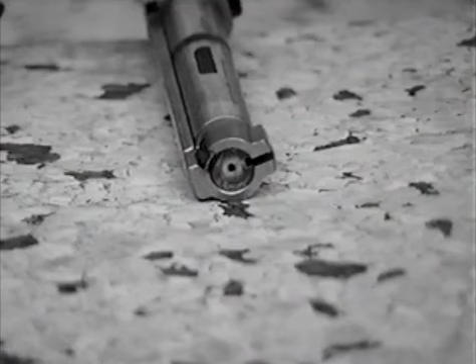There are two methods used to cock the firing pin housed within the bolt. The first is where the firing pin is drawn back and cocked as the bolt handle is raised from the locked position. The second method cocks the firing pin as the bolt is pushed forward, just before it reaches the locking position.

Ammunition is either loaded directly through the floor of the receiver or is loaded into a magazine, which is then clipped into the receiver from below. As the bolt is eased forward, a round is pushed by the bolt face into the chamber of the barrel, and the bolt is turned by its handle to engage the lugs, which lock the bolt securely to the receiver, ready to fire a round.

As the round was chambered, a sprung extractor clip eases over the rim on the base of the round, ready to pull the spent case from the chamber when the bolt is pulled back. The spent case is ejected by an arm mounted at the rear of the receiver, which slides in a slot machined into the bolt face.

As the bolt is eased forward again, a fresh round is pushed into the chamber and the cycle is complete. These basic operations apply to both rimfire and centerfire rifles, the major difference being the firing pin, which is located centrally on the centerfire and located on the edge of the bolt face on a rimfire.

Before we continue, there are a few technical terms associated with ammunition, and the first is FPS. FPS is a shortened version of feet per second, and this is used to describe the velocity of the bullet, in the same way that mph, or miles per hour, is used to describe the speed of a vehicle.

Muzzle velocity is the speed of the bullet at or near the rifle's muzzle.

The next term is grains. Grains are a unit of weight, as are pounds, ounces, or grams. With all firearms, grains are used to describe the weight of bullets and also the weight of the nitro powder charge used in the manufacture of a complete round.

The last term for now is foot-pounds. Foot-pounds describe the energy of the bullet and is derived from a mathematical formula using the speed and weight of the bullet. Generally, a large foot-pound figure has more stopping power than a smaller one.

Now, we'll have a brief look at internal ballistics, and we'll start with rimfires. Modern rimfire rifles use the long rifle round. Rimfire long rifle sonic and subsonic rounds are the same size, but the Magnum round, which is larger, needs a rifle chambered to accept it.

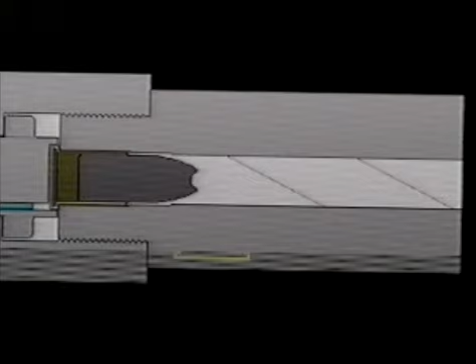The round is fired by the firing pin striking the rim of the case, which compresses the primer, causing it to detonate. The hot gases from the primer then ignite the propellant, and the resulting expanding gas forces the bullet from the case and up the barrel.

Rimfire ammunition cannot be reloaded.

Now, we'll look at centerfire ammunition. Centerfire rifles are available in many different calibers, and the ammunition has many variations in weight and type.

The case for the centerfire rifle ammunition is normally made from brass, with a primer pocket in its base and a small flash hole leading from the primer pocket into the main part of the case.

The primer is formed from a metal cup and contains a solid disc of explosive with a tiny metal anvil inserted upside down in contact with this explosive. The primer is pressed into the pocket in the bottom of the case.

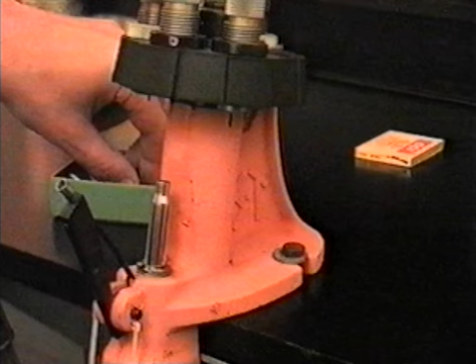A measured amount of propellant powder is now added, and finally, a bullet is pressed into the case mouth.

When the firing pin strikes the primer, it distorts the metal cup and compresses the explosive against the anvil, causing the explosive to detonate. The resulting flash travels through the flash hole and ignites the propellant.

The expanding gas from the propellant first forces the brass case to enlarge, which seals the small space between the chamber and the case. Then, the still expanding gas forces the bullet from the case and up the barrel.

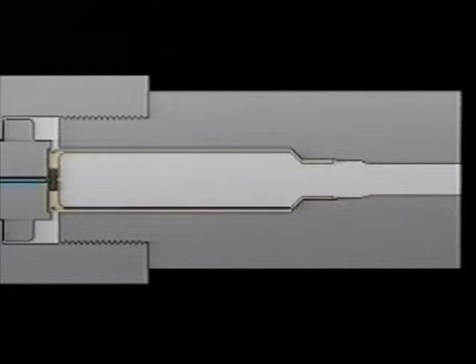The initial expansion of the case to seal it in the chamber is very important. Pressure in the case can reach 50,000 pounds per square inch, and as well as sealing the case to the chamber, the friction between them holds the case in position, which ensures that the bolt is not unduly stressed by the case moving rearwards.

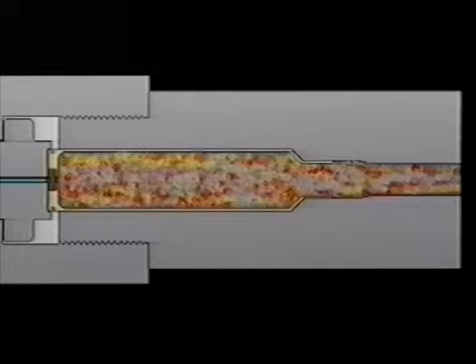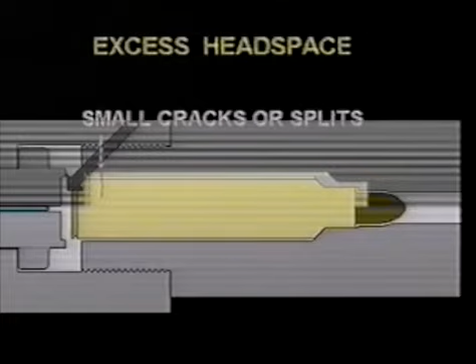Extreme pressure on the bolt face will eventually cause excess headspace. This is the distance between the bolt face and the rear of the case when the bolt is closed. Excess headspace will lead to case fractures near the rim, which in severe cases will blow the rifle apart.

Check your spent cases, and if you find any splits or cracks, take the rifle to a gunsmith. Don't use it. Always make sure that your ammunition is clean and free of oil or water, and when you clean your rifle, ensure that the chamber is also clean and dry.

As you have already seen, centerfire ammunition can be reloaded. Before we move on, always buy good quality ammunition in a reasonable quantity from the same manufacturer's batch.

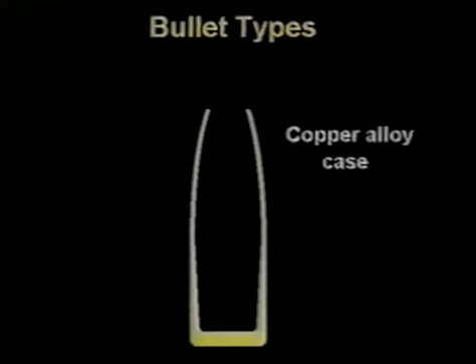As mentioned earlier, rimfire bullets are generally made of soft lead with a wax or gilded finish. But because of the much higher bullet velocities and weights used with centerfire ammunition, the construction is a lot more complex. Centerfire bullets are generally constructed with a copper or copper alloy case which is filled with lead or an alloy of lead.

The most widely used types for hunting are the soft point and the hollow point. Both soft and hollow point bullets expand and mushroom easily when contacting flesh and bone. This expansion slows the bullet down and therefore expends most of its energy within the quarry.

Full metal jacket and target or match type bullets are designed for range shooting and not hunting. They tend to travel straight through flesh without expanding, and they should not be used on live quarry.

Now we'll look at external ballistics. The following diagrams and tables are only examples and are exaggerated for the sake of clarity. Refer to your ammunition manufacturer's ballistic tables for your own caliber, or if you reload, then use the bullet maker's tables.

Regular shooting practice over known distances will give you confidence in gauging bullet drop and wind effects at various ranges. And first, we'll look at bullet drop. Imagine a rifle fixed to a stable platform and adjusted so that the line of the bore is parallel to the ground.

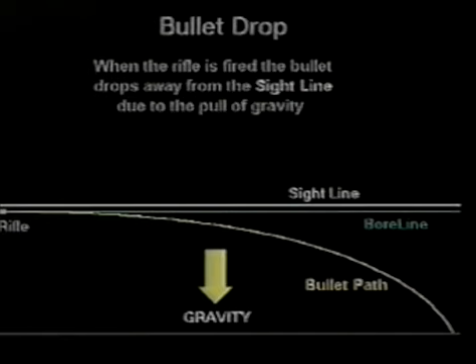If a bullet is now fired, the force of gravity pulls it downwards until it finally hits the ground some distance from the rifle. The further the bullet travels away from the rifle, the greater the distance between the sight line and the bullet.

If we now adjust the telescopic sight so that the sight line crosses the bullet path at, say, 200 yards, the rifle is now said to be zeroed at 200 yards.

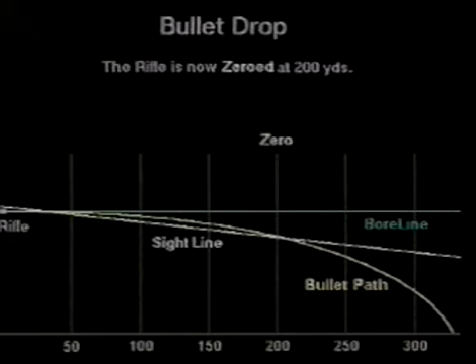The bullet crosses the sight line a few yards from the barrel and then travels above the sight line before the zero and below the sight line after the zero.

At 50 yards, the bullet is 0.6 of an inch high. At 100 yards, it is 2 inches high. And at 150 yards, it is 1.8 inches high.

At 250 yards, the bullet is 4 inches below the sight line, and at the 300-yard mark, it is 12.5 inches below.

We'll be coming back to bullet drop shortly, but now we'll look at the effect of wind on the bullet.

With a 20-mile-an-hour headwind, the bullet still follows the sight line, but as the wind changes direction, so the bullet is blown further away from the vertical axis, as its distance from the rifle increases.

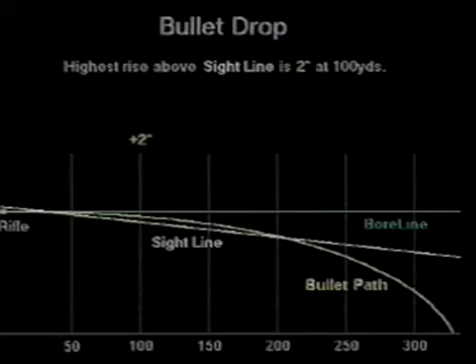If we go back to the bullet drop diagram, the maximum rise of the bullet above the sight line is 2 inches at 100 yards. By using the ammunition maker's ballistic charts, or by trial and error on a range, we look for a corresponding drop of 2 inches below the sight line.

If we now go back to the windage diagram and put the 235-yard mark from the bullet drop calculations on it, we have a maximum deviation with a 20-mile-an-hour wind of 1.9 inches.

If the maximum deviation at different ranges is added to the bullet drop target, it will look like this, at the fixed ranges of 50, 100, 150, 200 and 235 yards.

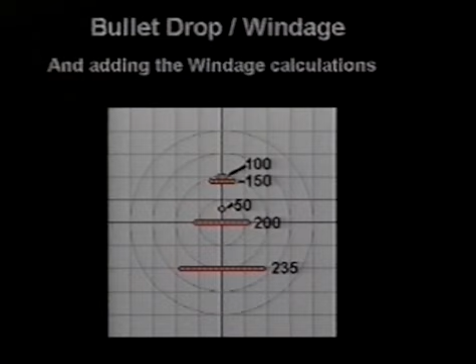So, for any wind up to 20 miles an hour and at any range from say 40 yards out to 235 yards, the bullet will strike within this triangle.

If you imagine the 4-inch triangle superimposed on an animal, the relative size of the triangle is proportional to the quarry size. No matter what the range, the triangle's size remains relative to the size of the animal.

Using this method, we only have to estimate one maximum distance, also one maximum wind speed. In this example, the maximum distance is 235 yards, and the maximum wind speed is 20 miles an hour.

The next area to look at is elevation, or firing up and downhill.

With the rifle on the left of your picture, and using the previous example of a 200-yard zero, the bullet path looks like this. If the rifle is now pointed upwards at an angle of 45 degrees, the bullet will strike higher than it did when the rifle was level.

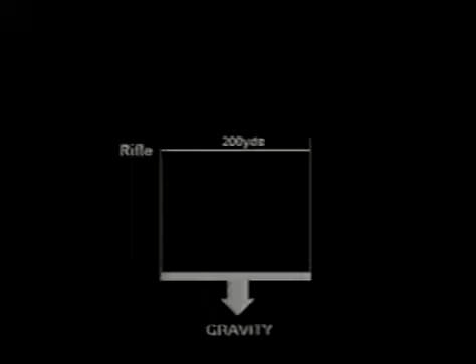But when the rifle is fired up or downhill, the pull of gravity at 90 degrees to the horizontal over this shorter distance has less effect, and the bullet will strike higher than it did when shooting on level ground.

With light bullets and or higher muzzle velocities, the bullet rise will be much less. At normal hunting ranges, say up to 200 yards, and with a reasonable elevation of less than 30 degrees up or down, there's really no need to compensate for bullet rise if using the point-blank range technique. But if you do compensate, then always aim low.

The last item here is recoil. The laws of physics states that for every force there is an equal and opposite force.

When a rifle is fired, the expanding gas forces the bullet up the barrel, but it also pushes the rifle in the opposite direction. Here, we'll use a bullet weighing 200 grains with a muzzle velocity of 3,000 feet per second.

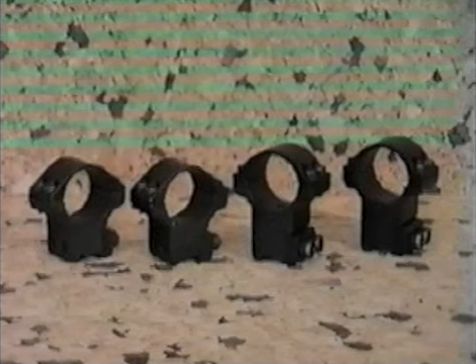During the winter months, you may have many layers of clothing compared to the summer, which will alter the length of pull, so bear this in mind if you have your rifle altered. If you have to use high mounts for your scope because of a large objective lens, then you may need to add padding to the cheek piece to get a comfortable fit.

Eye relief is a term used to describe the distance from the rear lens of a telescopic sight to the shooter's eye when a full, clear sight picture can be seen. Cheaper scopes meant for air guns or rimfires tend to have a short eye relief. If this scope were used on a heavy recoiling rifle, the metal rim could cause serious damage to your eyebrow when the weapon is fired.

If you close your eyes, then mount the rifle and rest your cheek on the stock in a comfortable position as though aiming the rifle, when you open your eyes, you should get a good sight picture. If you have to move your head backwards or forwards to get a correct picture, then the sight needs moving in the opposite direction. The objective is to get a good sight picture as soon as the gun is mounted.

A lot of people hold the stock on the forend much too tightly. This can cause the sight picture to move in time with your heartbeat, and even cause your muscles to tremor, which will affect the sight picture and, of course, accuracy.

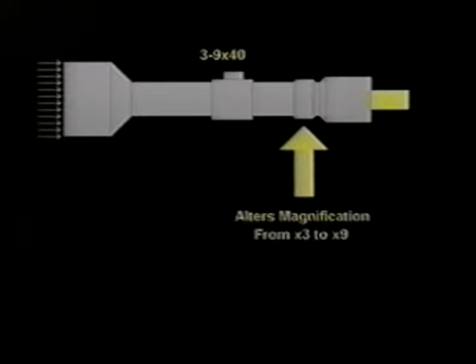This is a variable power scope of 3 to 9 times magnification, with an objective lens size of 40 millimeters. The magnification is varied by rotating a ring placed in front of the eyepiece. As you can see, the exit pupil diameter alters as the magnification of the scope is changed.

Most modern rifles are equipped with grooves machined into the top of the receiver, which will accept one-piece mounts. Some rifles, especially the old Mauser actions, need drilling and threading to accept blocks, to which scope rings are then fitted.

Get the correct mounts and make sure that the objective lens is not touching the barrel and that the eyepiece doesn't foul the bolt handle. Before you try and zero a new rifle or scope, I would suggest that you disassemble the mounts and reassemble them using a thread locking compound, so that the fixing screws won't come loose after prolonged use.

Using a screwdriver or Allen key, take off the ring tops. Remove the scope and place it somewhere safe. Next, remove the ring bases. Now clean the dovetails and the grooves in the receiver.

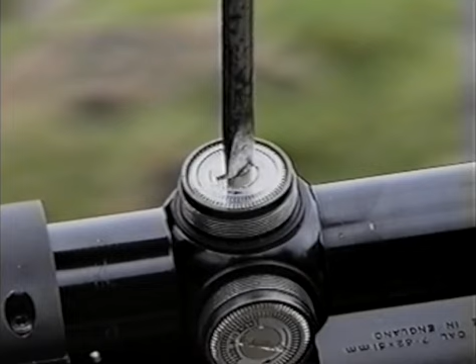The final groups were around 1.5 inches low of the horizontal line, which is about right at this stage, but now we need to set the horizontal zero a bit more precisely. Using the elevation adjuster, we need a group that is near the cross for small caliber, low velocity centerfires and rimfires, or 1/2 of an inch below the cross for high velocity centerfire rifles.

Using the same technique as before, adjust the elevation to bring your group up, and then we can zero the rifle at our intended hunting range.

If at this stage your groups were wildly off, let's say 4 or 5 inches up or down, then the chances are that the sight mounts are wrong. This normally happens with Mauser type actions, where one of the mounting blocks is the wrong size, and this will have to be changed. Otherwise the scope adjustments will be at their extremes, or you may not be able to zero at 100 yards at all.

Now we'll zero at a normal hunting range. As a rough guide, a normal zeroing range for rimfires is 50 to 70 yards. Magnum rimfires and Hornet centerfires can be zeroed at 100 yards, and high velocity centerfires need to strike around 1 inch high at 100 yards, but this is personal choice.

To zero a rifle at say 100 yards, I prefer a proper target, which will allow you to see more precisely where the bullet groups are striking. It's worthwhile spending half an hour with a ruler, pen and compass making a proper target, which can then be photocopied.

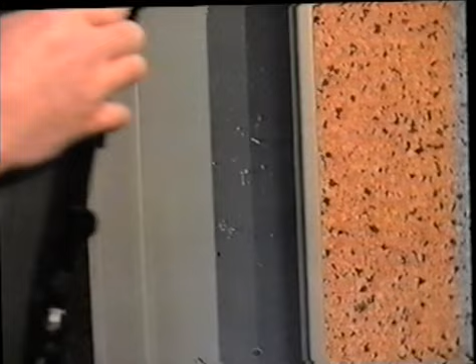If you have stored the rifle with an oiled barrel, use 2 patches to remove most of the oil, followed by 1 patch soaked in meths and 2 dry patches to finish. If you don't finish off with methylated spirit, you'll find that the first few shots will be wide of the mark, due to residue from the cleaning solvent or oil in the barrel.

Lightly oil or spray the exterior metal and wipe clean. If you have a good walnut stock, occasionally rub walnut oil into it with the palm of your hand and leave to dry overnight in a warm room. Polish off with a soft cloth. Varnished or synthetic stocks can be cleaned using a household furniture spray and polished off.

At least once a year, or if the rifle is used in very wet weather, take out the action screws and remove the barrel and action from the stock. Brush off any grit or mud from the metalwork, and if there is any rust, fine wire wool soaked in oil should remove it.

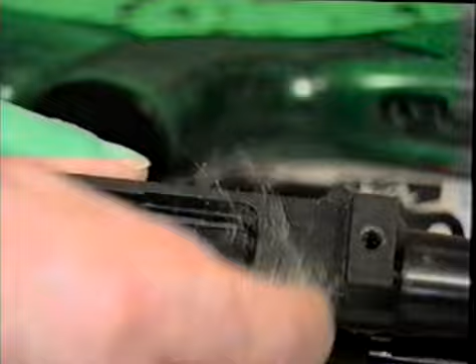If the bluing is affected, get a retouching kit from your gun shop and follow the instructions. Finally, rub oil into all of the metalwork. Brush out the bedding and barrel groove in the stock and reassemble the rifle, taking care to tighten the action screws.

That about brings us to the end of this video, but here are a few tips that might help you. No matter how good a shot you think you are, always spend time on a range, shooting over known distances and in different weather conditions.

Shoot in windy and wet weather to see the effect it has on your bullet placement. Practice kneeling, standing and sitting shots, as you won't always be able to get comfortable in a prone position. And if in doubt, don't shoot.

Get some covers for your scope. These are sometimes supplied with it and are available in various forms, but the ones I prefer are the flip-up type made in America. They fit snugly over the objective lens, and to see through the scope, you just push the small ear forward and the cover springs out of the way. To replace it, just snap it back again.

This type of cover is also available for the eyepiece, but if you have a heavy recoiling rifle, be aware of the operating lever, as this can sometimes catch your eye.

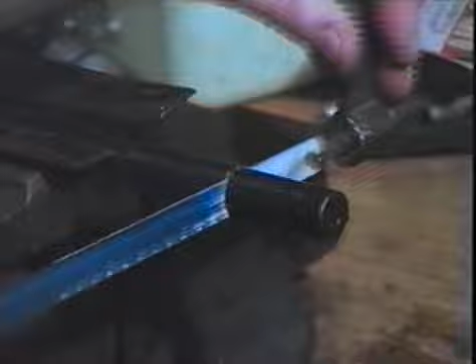The action screws which clamp the receiver and barrel assembly to the stock can cause a lot of accuracy problems. This is more pronounced with a wooden stocked rifle that has been manufactured with foreend pressure. Foreend pressure is used to cut down barrel vibration on light-barreled hunting rifles, which makes them more accurate when using run-of-the-mill ammunition. To check if your rifle has this foreend pressure, slide a piece of paper under the barrel and into the forend.

If the paper stops, then you have foreend pressure, or rubbish, under the barrel. If the paper goes down to the receiver, then the barrel is floating.

If one or both of the action screws are loose, you will get inconsistent groups as the action moves and the fore-end pressure alters between each shot. On the other hand, if the screws are much too tight, the point of aim will alter as the wooden stock swells and shrinks because of humidity and temperature.

With a floating barrel in a wooden stock, these effects aren't so pronounced, and they're even less noticeable with a synthetic stock. The action screws must be reasonably tight, not forced, with the front screws slightly tighter than the rear.

Take out the action and barrel and look at the bedding. The recoil lug has to sit squarely against this front face. The mark left by the lug should be even across this face and across the top. There should be a mark under the tang, but there should be minimal signs of wood to metal contact in the area around the back and sides of the tang.

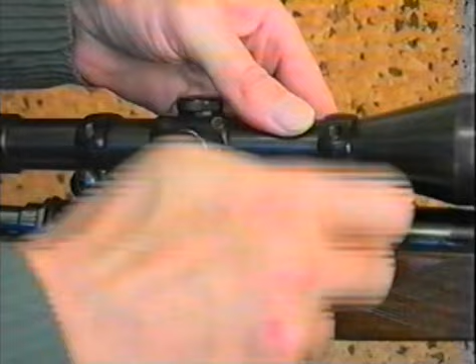Now refit the scope, tightening the bases. Then the ring top that you loosened, then check the other ring top.

If you don't undo one of the ring tops and you tighten the ring bases, you can build a twist into the scope which may cause problems later.

Don't over-tighten the ring tops. Because of the large surface area between the rings and scope, the ring tops only need moderate tightening. If you overdo it, you'll only damage the scope. It won't be any more secure.

Now check if the rifle is still zeroed.

If the parallax is wrong on your scope, then by placing your eye in a slightly different position every time you mount the rifle, the point of impact can change quite dramatically.

The eyepiece adjustment allows you to focus your eye on the crosshair and your target at the same time. This must be correct before you try to eliminate parallax. Point the scope at the sky or a white wall and the reticule should appear sharp and distinct. If it's not, then adjust the eyepiece to suit your eyes.

With the rifle supported on sandbags or any solid rest, look through the scope at a target placed at your average hunting range. Place the crosshair on the target center by adjusting the rifle on its rest. Without moving the rifle, move your eye from side to side, and if the crosshair moves around the target, then the scope's parallax needs adjusting.

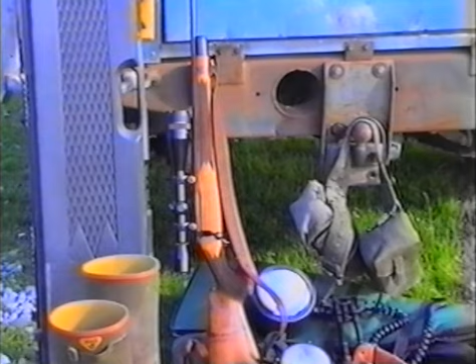Now we come to the biggest cause of inaccuracy. Rifle hunting is expensive. You've already spent a lot of money on a rifle, a scope, a gun slip, a sling, special clothing and boots, perhaps lamps and batteries, bipods, travelling expenses, maybe dogs and a 4-wheel drive vehicle. You may have to pay for your shooting rights, especially deer stalking, so why try to save 10 or 20 pence on a round of inferior ammunition?

Unless you can get consistent ammunition that suits your rifle, then you've wasted your money. In my experience, and that of friends and colleagues, one of the most consistent manufacturers in recent years has been Federal.

If you're confident that you haven't damaged the rifle or scope, you know that you've maintained the rifle fairly well, and yet you suddenly get flyers or groups resembling a shotgun pattern, then the first thing to look at is your ammunition.

If you intend to buy a quantity of ammunition, then buy one box and try it. If there are no flyers and your group is good, then go back and buy your quantity, but make sure they all have the same batch number as the box that you've just tried. If you only buy one box at a time, then zero your rifle with each new box.

When we talk of bad ammunition, we usually mean inconsistent ammunition. This can be caused by variable weights of powder, unreliable primers, even varying bullet weights.

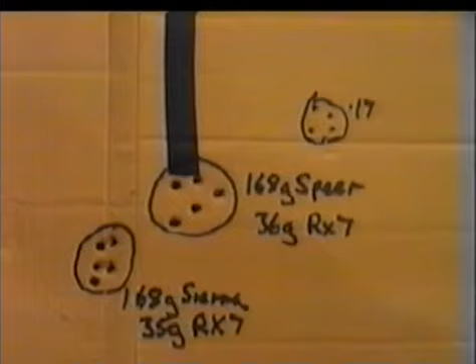If the initial equipment costs put you off, then look for second-hand gear. Or, if you have friends that reload, then see if they are willing to let you use theirs.

Reloading is perfectly safe as long as you're sensible. Read the labels on the primer and powder cartons and always keep them in their original packaging. Nitro powder is not an explosive, but it will burn very fiercely, giving off a lot of heat and gas, and it should always be left in its original carton. Don't smoke or drink while reloading. Always wear eye protection. If you're sensible and careful, then reloading is perfectly safe.

When the firing pin strikes the primer, the round is pushed forward to contact the front of the chamber and the primer is detonated. The force of the primer detonation pushes it rearwards until it contacts the bolt face. The powder in the case is ignited by the primer flash, which burns and gives off heat and gas.

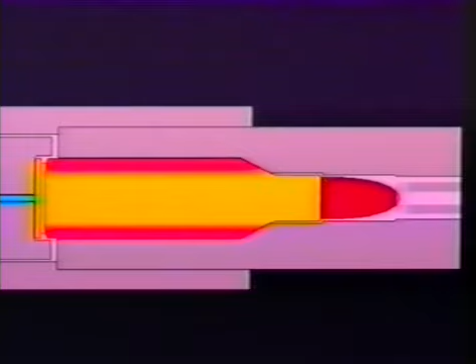The gas pressure builds up and forces the case to enlarge, which gives a gas-tight seal between the case and the chamber. The case also expands backwards and reseats the primer, taking up any gap between the rear of the case and the bolt face, or head space. The brass of the case also flows forward slightly, which lengthens the neck towards the throat.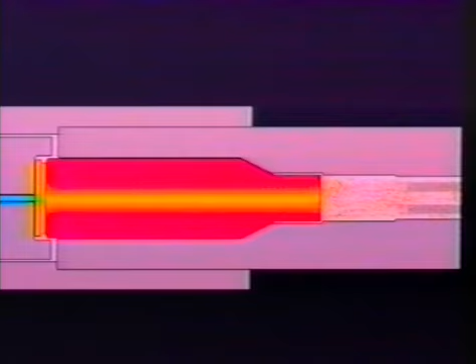The still expanding gas forces the bullet from the case and into the throat, where it starts to bed itself into the rifling. The powder should still be giving off gas to propel the bullet up the bore, but it should have peaked in its burning cycle by the time the bullet is around 1/4 of the way up the barrel. As the pressure drops and the case cools, the brass contracts enough for the case to be extracted.

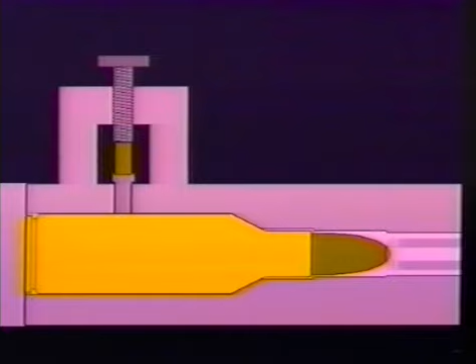The most important aspect of reloading is understanding the tremendous pressures involved when a round is fired. There are 3 methods used by manufacturers to measure case pressure. The crusher system, or CUP, relies on a special copper rod being compressed by the case as it is fired in a pressure barrel. The rod is accurately measured before and after firing, and the case pressure can be calculated from the difference between the 2 readings.

The second method is the electronic piezo system, which measures PSI, where the pressure is measured electronically again in a purpose-made receiver. The third method is visual inspection.

Looking for high pressure signs includes squashed primers, burn marks around the primer, but this can also happen with an oversized primer pocket. Cratering around the firing pin indentation, though this can also occur with a weak firing pin spring or an oversized firing pin hole in the bolt face, caused by continual dry firing, or by accurately measuring the case head before and after firing.

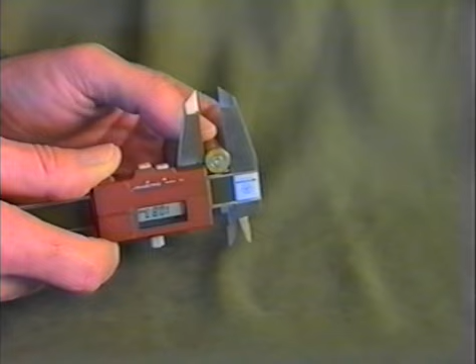Some low-pressure signs include primers partly backed out of their pockets, and burn marks along the case sides. Burn marks around the neck are normal, but not on the shoulder or sides of the case.

These are fine if you only have the one caliber. Otherwise, I would suggest one of the general purpose books, such as the Lyman Handbook, which is filled with all sorts of reloading information for all calibers. Alternatively, specific bullet and powder manufacturers' tables are available, but obviously they only show their own products.

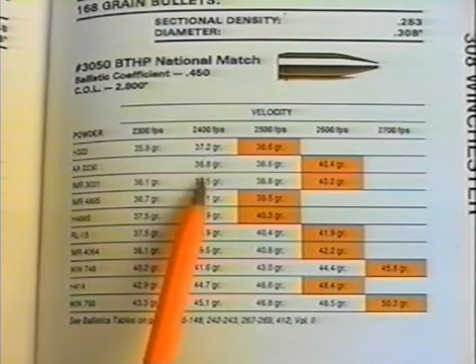If you look up your caliber, you'll find a table of powder weights for each bullet type. The table for this bullet has the powder types on the left, with the bullet velocities across the top for the different weights of each of the powders. The leftmost columns are the suggested starting loads, followed by normal loads, with maximum loads on the right. Never use less powder than the recommended starting loads, and maximum loads should be approached with caution.

American reloading tables are normally compiled using the SAAMI guidelines, and you may see a column relating to pressure next to some recommended loads.

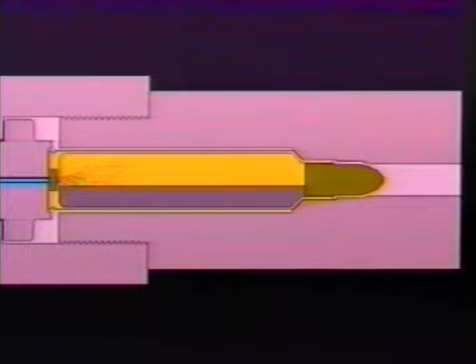Overloading with all powders will obviously give high and possibly dangerous pressures. Underloading can be even more dangerous. Some underloaded powders may not ignite properly and the bullet can jam in the bore. With other powders, when a case is only partially filled through underloading, the primer flash can ignite the large surface area of the powder almost instantaneously. This can cause certain powders to ignite too quickly rather than burn at a controlled rate, resulting in a sudden and massive increase in pressure. This all sounds a bit alarming, but as long as you follow the loading tables, you'll be quite safe.

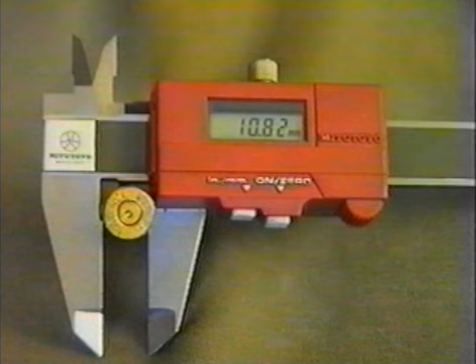Every caliber has a specific set of measurements that relate to a standard size for that caliber. These sizes and measurements are shown in most of the reloading tables. Your rifle's chamber is made slightly larger than the standard size so that the round can be inserted easily without sticking.

No two rifles have exactly the same internal chamber dimensions. Normally, the differences are tiny; sometimes they're quite large. After firing a factory round, the case has altered in shape to fit the chamber. Because of the natural springiness of brass, the case will be the exact shape of the chamber, but slightly smaller overall. This is why you can extract the case after it's been fired.

Although the case exactly fits the dimensions of the rifle's chamber that it was fired in, if it's going to be reloaded and used in a different rifle, it may be too big to chamber properly, and the neck will be too large to grip the bullet. The case will have to be full-length resized to bring it back to its original dimensions.

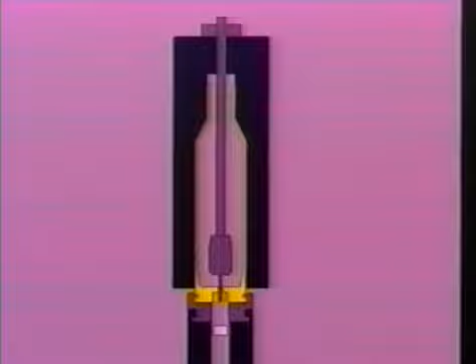As the case is forced into the full-length resizing die, the walls, the shoulder, the neck, and the case length are compressed slightly smaller than their original size. As the case is withdrawn from the die, the brass expands a little, and the case is back to its original size apart from the neck.

As the case is pulled further down the die, the neck expander ball contacts the inside of the neck and expands it to the right dimensions to hold a bullet. This last operation also lengthens the neck slightly.

If the case is only being reloaded for use in the original rifle, then because it fits the chamber exactly, only the neck needs resizing to grip a bullet. The neck sizing die looks similar to the full-length die, but as the case is forced upwards, only the neck is compressed, then sized by the expander ball on its way down.

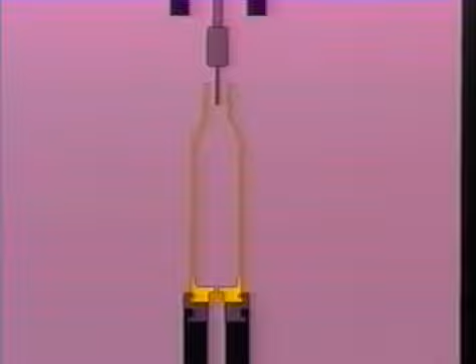Of the two resizing methods, neck sizing generally produces better accuracy. But if you use maximum or near maximum loads, then you may have to full-length resize occasionally when cases become harder to chamber through case expansion with these heavy loads.

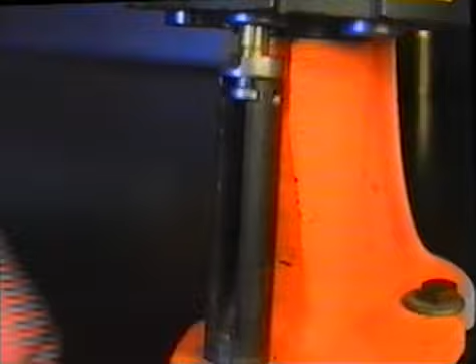With large cased, small bullet rounds, such as the 22-250, and especially the .17, full-length resizing can quickly lead to premature neck cracks because of the force exerted on the neck and shoulder area when these high-powered cases are resized. I only neck size these cases.

The case and neck will have stretched during the firing and resizing process. This shouldn't be a problem with the first or second reload.

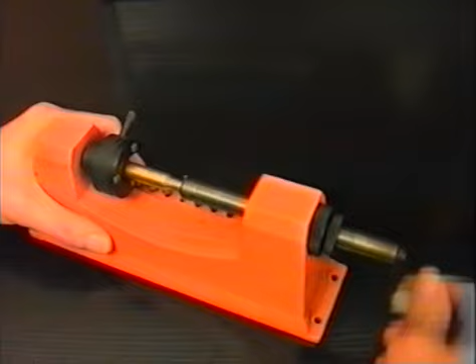The case length should be accurately measured and compared to the recommended maximum case length from the reloading table. If the case length is the same or more, then it must be trimmed to slightly less than the recommended maximum length.

There are various methods to trim cases, either by filing in a special die, cutting with an internal trimmer, or a universal trimming machine such as this. The case is gripped by a collet-type mechanism, and using the correct pilot, the case is trimmed by this cutter to a length set by these movable rings.

The case will have sharp edges on the inside and outside, and these must be removed with a deburring tool.

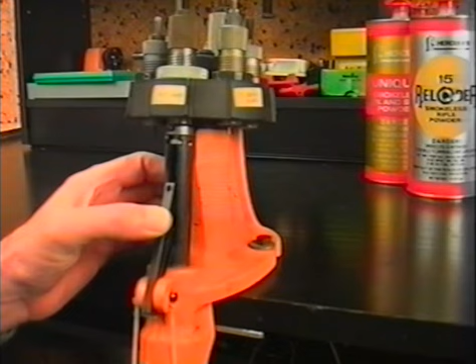The most basic item is a press, with or without a primer arm to insert primers. You will need a set of dies and a shell holder for your caliber. Most resizer dies also decap the used primer in the same operation.

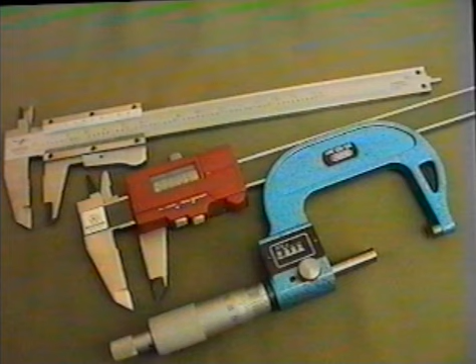You'll need a set of scales to measure the powder, a pad and lubricant to lubricate the cases, a powder funnel, a primer pocket cleaner, and a means of measuring your cases, such as vernier calipers.

These items will be enough to start with, but later on you will also need a case trimmer, a case neck deburring tool, a powder measure helps if you reload a lot, and a powder trickler. All these items should last for many years, so they could be regarded as a one-off purchase.

Now for the ammunition itself. First, you'll need some cases. You probably have a collection of used cases. If they're all manufactured by the same company, such as Remington, Winchester, or Norma, etc., and they were all purchased at the same time, then use these.

If they're all mixed, then buy cases of the same make and batch. If you use mixed cases, then you will find that the point of impact changes from one make of case to another. The idea of reloading is to maintain consistency, so start as you mean to go on and get a good supply of the same make of case.

If you look after the cases and don't go for maximum loads all the time, then the cases can be reloaded many times.

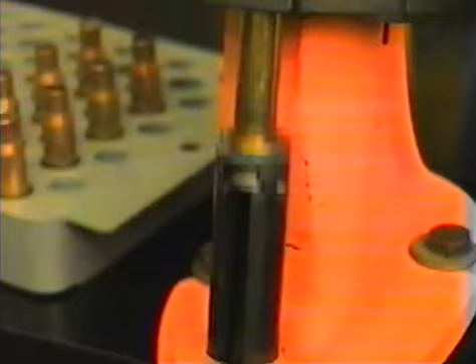Next, you'll need some bullets. Look in your book of tables and choose a normal weight soft point for your caliber. Don't go for anything exotic until you've had some experience with standard weights.

Starting with the smallest caliber, the .17 is made by Hornady in one weight, 25 grains. For Hornets, you must get the thin-walled 40 or 45 grain bullets specifically designed for them. Normal 45 and 50 grain high-velocity bullets, as used in 222s and 22-250s, have much thicker walls.

Stick to 50 grain bullets with the 222 and 55 grains with the other high-velocity .224 calibers such as 223s, 224s and 22-250s. For the 6mm or 243, I would suggest 85 to 90 grains, although 100 grains is the legal minimum for deer at the moment in England and Wales.

For the 25 or 257 calibers, the average weight is around 100 grains, and the 6.5mm or 264s have a limited choice between 120 and 140 grains.

The 270 averages 130 grains, with the 7mm or 284s averaging 145. The biggest choice is the 30 calibers, such as the 308 and the 30-06. I would suggest 150 grains to start with. The same goes for the 303.

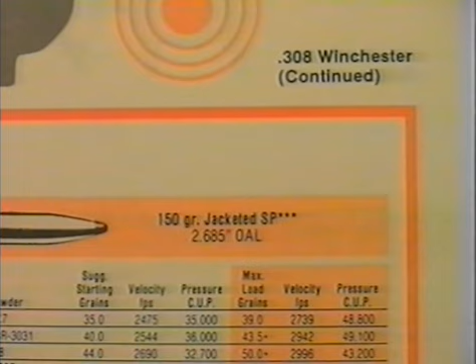Now that you've chosen a bullet, look in your book of tables and choose a powder. Some tables recommend a particular combination of bullet, primer and powder as the most accurate they have found during testing. Notice that the most accurate load is not the most powerful one.

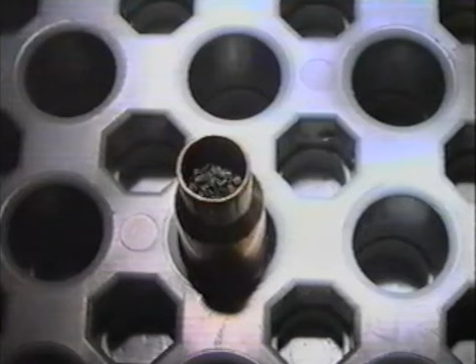If your table doesn't recommend a particular load, then go for a powder that has the larger weight or may be shown as a compressed charge near maximum loads. This is to ensure that the case is as full of powder as possible, which generally gives more consistent results than a partially filled case.

Don't buy a powder unless you have a table for it, and whatever you do, don't mix different powders together, as the results will be totally unpredictable.

Now look for the primer that's recommended. Primers come in 4 sizes: small and large rifle and small and large pistol. As we're only interested in rifles, here is an equivalent chart for different rifle primers.

If your loading table recommends, say, Remington 9.5, then you can use Federal 210, CCI 200, etc., depending on what your local gun shop has in stock, but reduce the load slightly and work up.

These are bench rest primers. They are manufactured to a very high standard to give consistently good results, and they can be used instead of normal primers.

Magnum primers are mainly used in large cases filled with slow powder, but they also give more consistent ignition during very cold weather. They also cause higher pressures than normal primers, so if you want to use Magnum primers and they aren't shown in your loading tables, reduce the load to the minimum shown for your powder and work up. So, you've got everything you need.

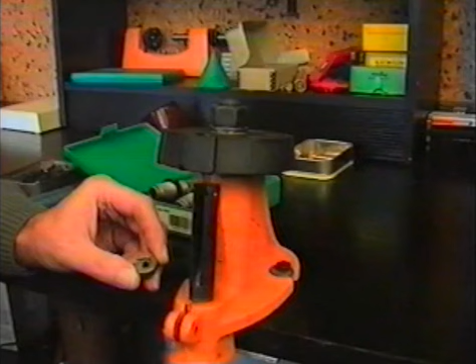To install the full-length resizer die in the press, first insert the correct shell holder into the press ram. Now raise the ram right up and screw the resizer die into the press until it touches the shell holder. Lower the ram and screw down the die a further 1/8 to 1/4 of a turn and tighten the lock nut on the die.

When you press down on the arm, you should feel the press cam over at its lowest point with reasonable resistance. If a lot of effort is needed, then slacken the die slightly. Now check that the neck expander ball is about 1/8 to 3/16 of an inch above the base of the die and tighten its lock nut.

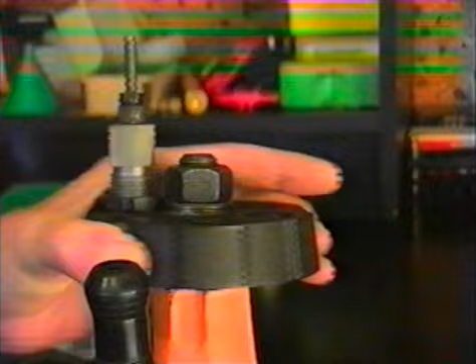To install a neck sizer die, start the die in the press and put a case into the shell holder. Put the ram in its highest position and screw the die down until it touches the case mouth. Now lift the arm and screw the die in about 1/8 of an inch. Lower the arm and you'll feel the case neck being resized.

Raise the arm and inspect the case. You should be able to see the resized part of the neck. Now adjust the die until the resized part is just above the case shoulder and tighten the lock nut. The expander ball now needs to be set so that the primer will be pushed out at the same time.

If you are full length resizing, then apply case lubricant to your pad and rub it in with your finger. Too much lubrication will dent the case shoulder, whereas the case can jam in the die if there is none. If you gently pass a finger on the pad and you can feel a trace of lubricant, then it should be okay.

Everyone adopts their own routine for reloading, and I'll demonstrate a couple with their pros and cons. First, the quick way.

Inspect the outside of your cases, and if you find any cracks or dents, then throw them away. Look inside the cases, as they could be full of mud or fluff from your pockets. Now clean the cases with a dry cloth.

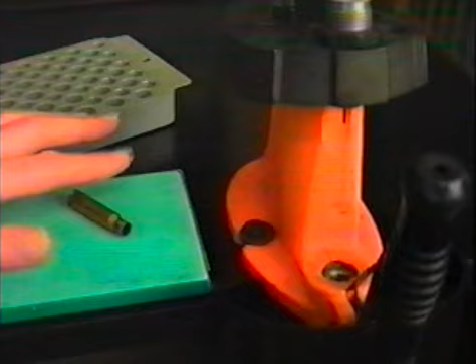Roll a case on the pad so that there's a trace of lubricant on the case body, not the neck, and put the case in the shell holder and slowly press down on the lever until it reaches its maximum travel.

The primer should have popped out. If not, then lower the ram and screw the decapping rod down slightly, lock it and try again.

Now place a primer into the priming punch. Push the punch into the slot in the ram and raise the lever.

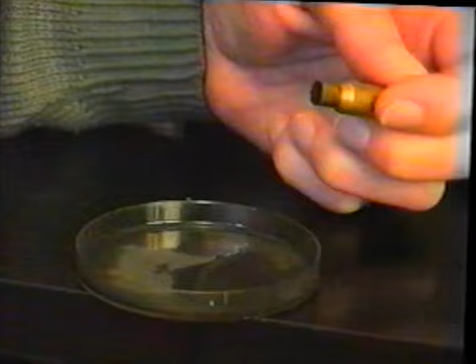As the ram is lowered, you'll feel the neck being resized by the neck expander ball. If this feels rough or stiff, then get some powdered graphite and apply a small amount with a paintbrush to the inside of the neck each time you resize a case.

You'll feel resistance as the primer enters the pocket in the bottom of the case and seats itself. Using moderate force, make sure that the primer is seated properly. You will soon get a feeling for this, and you'll be able to tell by the resistance to the arm when the primer seats properly.

If there's hardly any resistance, then the primer pocket is oversized, and you must not use this case. Throw it away. An oversized primer pocket is one of the symptoms of overloading or high case pressure. If the primer stands proud of the case, then it's not seated properly.

Now wipe the case with a slightly damp cloth to remove the case lube, dry it and measure the case length. If it's more than the maximum length in your table, don't use it. Put it in a box for later use when you have a case trimmer.

To reuse these cases, first pop off the primer by chambering it in your rifle and pull the trigger. Never try to punch it out on your press.

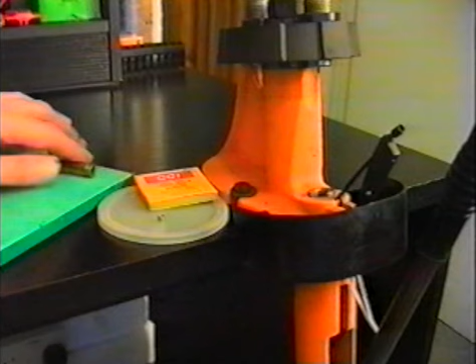The advantage of this method of case sizing is that it's quick, but there's a new primer in a dirty pocket. Your hands will have case lubrication on them, which could contaminate the primers when handled and cause erratic ignition. The inside of the cases might still have burnt powder in them, and the inside of the die will be covered in a dirty black sludge from the mixture of case lube and burnt powder from the outside of the cases.

Another method that works well with large batches is to treat each operation separately. Lower the decapping pin out of your full length or neck die until you can gently remove the spent primers without resizing the cases, and lock the pin in this position. Now decap all the cases.

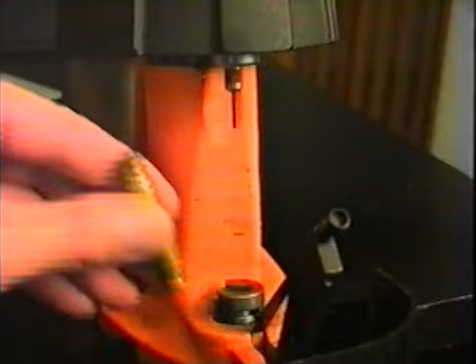Clean the primer pockets to remove any carbon, and clean all the cases in a wet or dry media tumbler.

If you haven't got a tumbler, then use citric acid powder from the chemist. Mix it with warm water in a washing up bowl. You may have to experiment with the amount of acid, but 2 or 3 tablespoonfuls to 2 pints of warm water is a start.

Stir the cases in the acid mix every 10 minutes and leave them for about an hour or so, or until they're clean.

After the cases have been tumbled or soaked, wash the cases in warm soapy water, followed by clean water, and dry them thoroughly.

Resize all the cases using proper case lubrication. The case lube can be removed with a damp cloth, or better still, wash the cases gently in soapy water again and dry thoroughly.

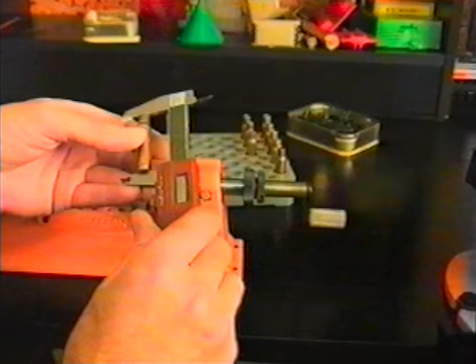Now you've got clean, dry, resized cases. They can be measured, trimmed to length, then primed. Whichever method you choose, the object is to end up with clean cases of the right length with properly seated and uncontaminated primers.

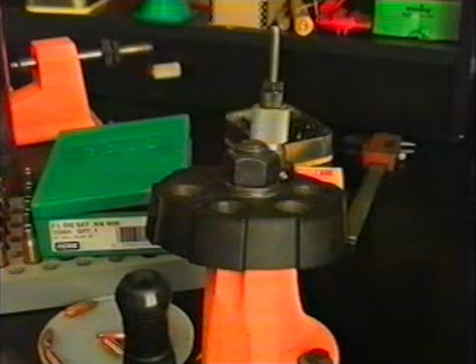Now for the powder and bullet. First of all, we have to set up the seating die. If you have a single station press, then take out the resizing die.

With the seating die, undo the lock ring on the middle bullet depth rod and unscrew it. Start the die in the press and, using a resized but unprimed case, put the case into the shell holder and raise the ram right up.

This case will become a dummy round that can be used for resetting the bullet seating die at a later date.

Screw down the seating die until you feel it touch the case mouth. Now unscrew the die about a quarter of a turn and tighten its lock nut.

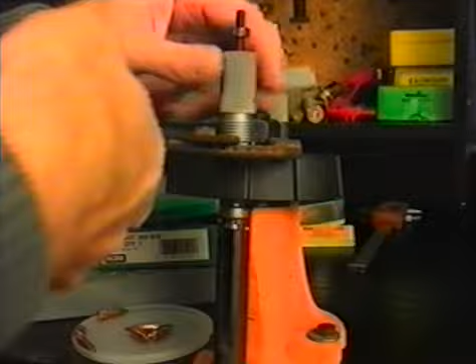Lower the ram and place a bullet into the case mouth. Raise the ram and screw in the seating rod until it touches the bullet tip.

Lower the ram about an inch and screw the seating rod in slightly. Raise the ram fully and you'll feel the bullet seating in the neck of the case. Now lower the ram and measure the overall length of the round.

Repeat this procedure until the bullet is seated enough to give the same overall length as shown in the reloading table. Now tighten the lock nut on the seating rod and the die is ready to use. This procedure applies to both full length and neck size only resized cases.

Now for the powder charge. Place your scales on a firm surface away from any plastic boxes, as these can sometimes carry a small electrostatic charge that can influence the readings.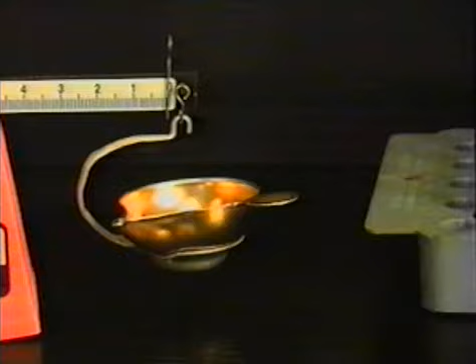Zero the scale by moving the counterweights to zero. Make sure that the powder bowl is clean and adjust the pedestal screw to obtain a level reading.

Move the counterweights to your intended powder weight. On this scale, the large weight moves in 5 grain increments and the small weight gives 1/10 of a grain. Your scale may be marked differently, but the principle is the same.

For this 168 grain bullet, I need a starting load of 31 grains of Reloader 7. Check the scales again just to be sure.

Now spoon the powder into the pan until the scale balances. Too much and the pointer goes above the level mark and we have to take some out. Too little and we have to add powder. This is a bit fiddly, but you'll soon be able to judge how much to add.

To make life easier, some die sets come with a measuring ladle. These can also be purchased separately and they give a fairly consistent volume of powder each time. Better still are the powder measures, where a container is filled and a consistent volume of powder is dispensed by moving a handle.

These methods only dispense volumes of powder, not weights. These dispensers are quite accurate when using 40 or 50 grain loads in large calibers, where part of a grain either way won't make too much difference. But in lighter rounds, using perhaps 10 or 20 grains, half a grain will be more than noticeable.

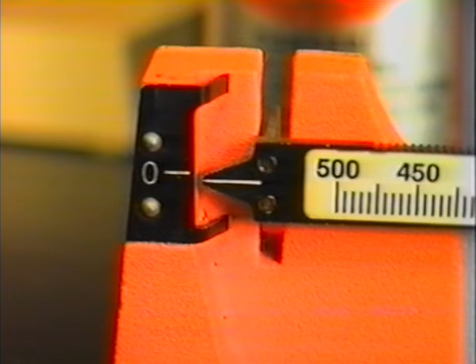By using a measure that is set to throw slightly less than you need, or a ladle that does the same, the weight can be gradually increased with a powder trickler until the scale reads exactly level. Using a small funnel, tap the powder into the case.

Put the loaded case into the shell holder, place a bullet into the case mouth and raise the ram to its full extent. Load another 4 rounds and this first batch can be tried at a target.

We'll assume that your rifle was zeroed at 100 yards with factory ammunition, so we'll try these first rounds at the same distance. Place your target or mark a cross with insulating tape towards the top of a large piece of card. An old cardboard box will do.

These initial loads may drop below the target, and the idea of the card is to see the first group, whether or not it hits the target. For continuity during these tests, thoroughly clean the barrel and chamber.

Pull or push through a patch soaked in meths a couple of times. Now a couple of dry patches. This is to ensure that the first couple of rounds aren't flyers due to oil or cleaning fluid in the barrel. And for the sake of continuity, use exactly the same cleaning method before you try each batch of reloads.

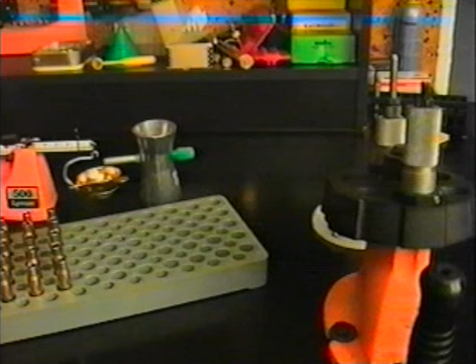Refer to your reloading table, and if, as in this case, the difference between the starting load and maximum is around 5 grains, then increase the load by 1 grain. If the difference for your caliber is say 3 grains, then go up by half a grain. Either way, load another 5 or 6 rounds and try them at the target.

Remember to clean the barrel and chamber exactly the same way as before, and take the same amount of time between each round.

This next group will probably strike slightly higher than the last. It may have moved across one way or the other, or it could even be lower. This is normally caused by the barrel vibrating differently, or the bullet exiting at another point in the vibration cycle.

Measure and note the group size as before and cover the holes. Check the cases again, then compare the group size with the previous one. If the group is about the same size, then carry on increasing the load and measuring until you reach the powder weights midway across the table.

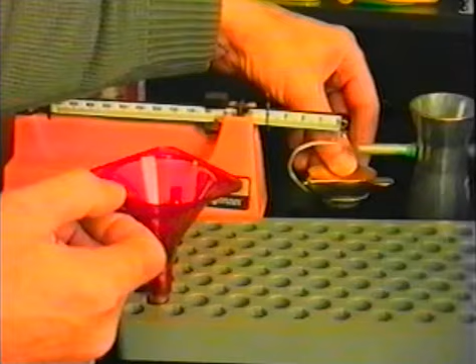If your groups are starting to get much bigger, then reduce the powder by half or 3/10 of a grain and try again. You're looking for the point where the groups start to increase in size. Then you can go back down in small powder weights until they are the minimum possible.

This will then be the optimum load for your powder, primer and bullet in your rifle. Most rifles will shoot tight groups from the starting load. They then begin spreading the groups at a certain point, and by using more and more powder, the groups get larger and larger.

Occasionally the groups can start large, then reduce with more powder, until they start to expand again as the charge gets even higher. You're looking for the smallest group size, at which point you can reload a number of rounds and zero the rifle to match them.

If your groups are large all through the powder weight range from starting to near maximum, and you're confident that your rifle is sound, then you'll probably have to try a different combination of powder and primer and start again.

If you change the primer, powder or bullet, or even get the same powder and primers but they have a different batch number, then go back to the starting load and work up again. Never take chances, and always inspect the cases after use.

Once you're happy with a load, then you can produce a quantity of rounds and zero your rifle with that load. Make a note of the bullet make and weight, the make of the primer, and the powder type and weight, so that you can reproduce this load in future.

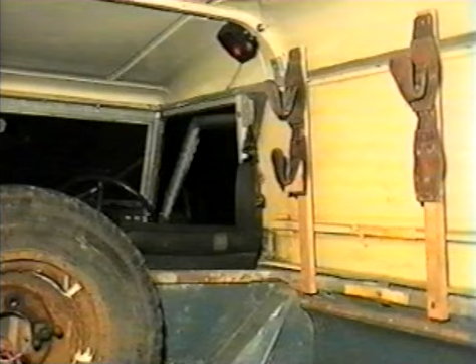The hill estate where I work takes 4 or 5 hours to cover by vehicle, so the rifle goes in the rack, and I use the Brinkmann for spotting.

Once a fox is seen, I switch all the lights off and stop the vehicle. It only takes a few seconds to grab the rifle, plug in the lamp, open the bipods, and shoot from the wing or the bonnet. I'd better just mention here that I only do this on the private roads within the estate.

If you're on foot, this particular lamp has a 2-position switch, which selects the main beam or a low-power walking lamp. I always carry a small torch in my pocket in case a fuse or a bulb blows. And in the vehicle, I carry spare bulbs and fuses in a tin.

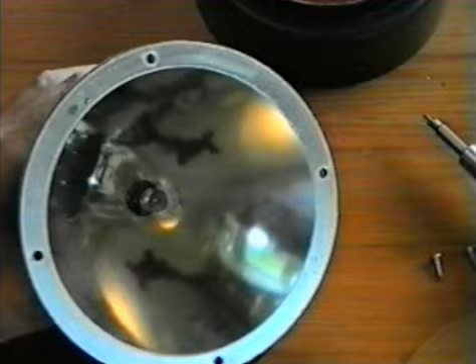Most modern lamps use a quartz halogen bulb of 50 to 100 watts. They're normally the same as the ones used in projectors, and they cost around £3 to £4 each. Don't touch the glass when changing them. Use a tissue or the bulb's packaging. If you do touch the bulb, then clean it with meths and dry it thoroughly.

I'm not too keen on the sealed beam type of lamps. A friend got through 3 in a season, and they cost him £25 each.

The Clulite has a narrow pencil beam and is supposed to give 1 million candle power with a 50-watt bulb. The Brinkmann has a wide beam and gives 1 million candle power with a 100-watt bulb.

The power consumption of a lamp is equal to its wattage divided by the battery's voltage. So a 50-watt lamp draws 4.2 amps at 12 volts, and a 100-watt draws 8.3 amps at the same voltage.

Most lamping kits use dry or sealed lead-acid batteries, normally marked with their voltage and ampere-hour rating. This battery is 12 volts and 17 ampere-hours, so the 50-watt lamp drawing 4.2 amps will last 17 divided by 4.2, or just over 4 hours continuous use. The 100-watt lamp, drawing 8.5 amps, will last 17 divided by 8.5, or 2 hours.

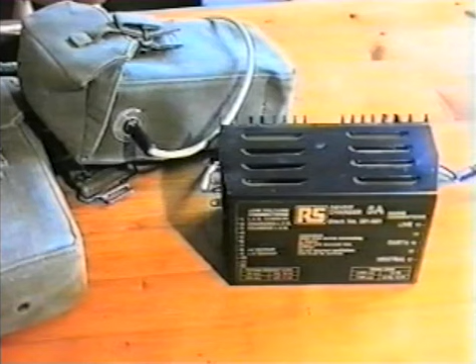Most problems with this type of battery occur because they're left in a discharged state for long periods, they're discharged completely, or they're incorrectly charged. As soon as you notice the lamp starting to dim, switch it off and recharge the battery. Never drain the battery completely, and never leave it discharged for long periods.

Your charger needs to be a constant voltage type, giving 13.8 volts. A car battery charger will ruin one of these batteries very quickly, as they are made for wet-type lead-acid batteries and give a higher voltage. It's worth measuring the voltage at the battery terminals as the battery is being charged, and it should climb to 13.8 volts, no more.

These batteries are still going strong after 5 years, and they're used at least twice a week.

You can fit a red filter to most lamps, and I think it's a matter of personal choice whether or not they make a difference to a lamp-shy fox. But I use 2 red fog lamps on the front of my Land Rover. With all the other lights off, these give enough light to drive around the estate at night without startling everything in the area.

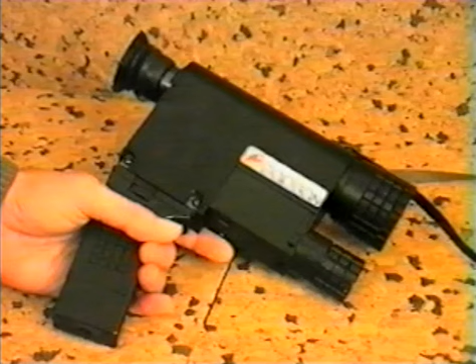I've tried a few of the cheaper night vision scopes, and I've been a bit disappointed. If you fancy one, then I'd suggest that you try it before parting with any cash.

If you're going to be out for more than a couple of hours, eat well before you leave and take a snack and a drink with you. When stalking isolated areas, take a compass with you. If the area is new, get a map and get a rough fix of the area and your starting point in your mind. If the weather closes in, you'll have a good chance of getting back to your vehicle relatively quickly.

Now we'll look at various hunting calibers. For small quarry out to 50 or 60 yards, the .22 rimfire can't be beaten. I prefer a 40 grain subsonic round as it tends to be more accurate than the lighter high velocity ammunition, and it's less affected by wind.

With a rimfire you can also fit a sound moderator. The speed of sound is around 1120 feet per second, so if a bullet leaves the rifle barrel faster than this, it emits a sonic crack, the same as a jet makes a boom as it breaks the sound barrier.

The bang from subsonic ammunition is the sound of the propellant exploding, and a good sound moderator can absorb most of this noise. But it won't quieten any crack from supersonic rounds.

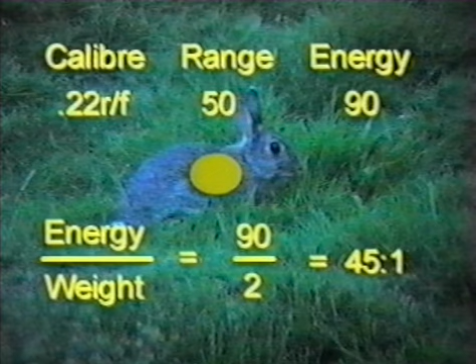For instance, using a subsonic .22 rimfire with a 40-grain bullet, the terminal energy of the round at 50 yards is about 90 foot-pounds. If the rabbit weighs 2 pounds, then dividing the energy by the rabbit's weight gives a ratio of 45:1. If you can group your shots at less than 2 inches, this will give consistent and humane kills. The same applies to foxes.

Using a light centerfire round, say a .222, at 100 yards the terminal energy is about 800 foot-pounds. If the fox weighs 20 pounds, this gives a ratio of 40:1. With a .22-250, we get an energy of 1200 foot-pounds, which gives a massive 60:1 ratio. For a fox, we need a consistent group size of about 3 inches.

With larger animals, such as a medium-sized deer of 120 pounds, the ratio is much lower. A .243 over 100 yards with a terminal energy of around 1600 foot-pounds will give a ratio of 13:1. Even the most powerful .270 round over this distance, delivering 2300 foot-pounds, will only push the ratio up to 19:1. So we have to be a lot more precise with larger quarry.

This involves exact bullet placement on a vital organ, such as the heart and lungs, or the bones in the animal's neck. For heart and lung shots, a group size of 4 or 5 inches will be needed. But for neck shots, the ability to group at 1 inch is essential.

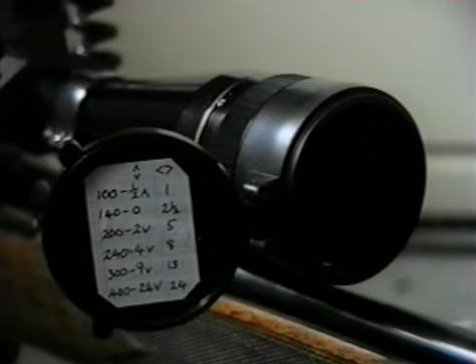It's easy to forget a rifle's bullet drop when changing from one caliber to another. Print it on a small label and stick it inside the scope cover.

Lastly, you have a choice of synthetic or wooden stocks. Synthetic is easy to clean and waterproof, but a traditional stock does look better.

I hope you've enjoyed these videos and that they've been helpful in one way or another. So keep checking your zero, keep it clean, and above all, keep it safe.